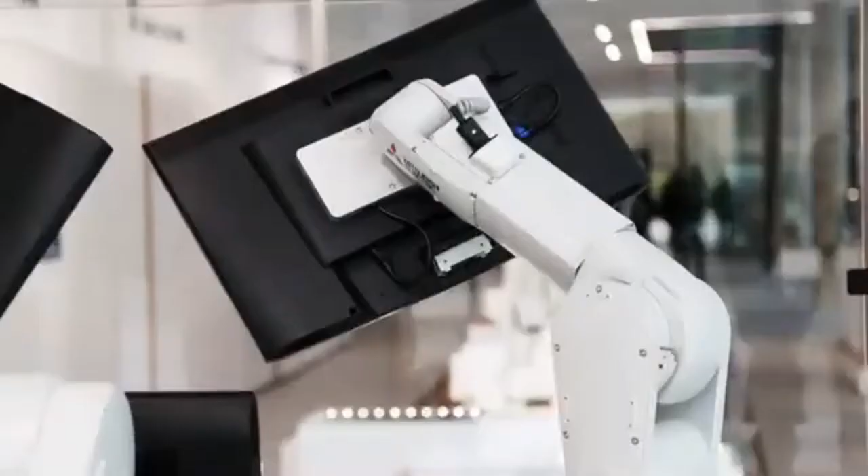To give a little bit of history on Mitsubishi itself, the Mitsubishi name and parent company has been around since 1870 and grown over 40 different entities and businesses it's dived into. You might know us from TVs, cars, VFDs, forklifts, all kinds of products, including CNC, of course.

But the CNC business didn't actually develop until 1956 in Nagoya. First office in the U.S. opened in 1974, and since then has expanded over 50 remote and satellite locations throughout North America and Brazil. Globally, we're actually in over 65 countries, there to support dealers and builders like yourself in Maxmill.

So with that being said, the product has also grown and had a lot of firsts in the market, such as the 32-bit CNC in 1986. In 1996, the world's first 64-bit PC-based controller. Now in 2015, we've got what we have now, the world's fastest dedicated processor, developed in partnership with another division.

So there's a lot of changes that have gone on and improvements. I've even spoken to people who've had a Mitsubishi controller in the past who have reacquainted themselves with some of the newer technology, and they're just blown away by how much Mitsubishi has progressed on the feature side of it and also on the service side of it.

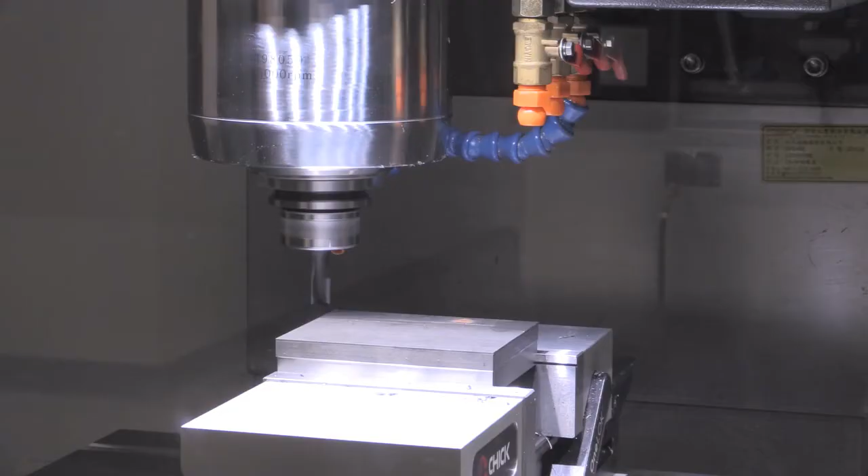Right, yes, of course. The dedicated processor is just one of the key elements making the Mitsubishi CNC what it is today, as powerful as it is. It's a dedicated processor meant to handle all the processes a CNC machine does without being bogged down by some of the other tasks a normal PC processor would do. You don't have to get bogged down by graphics or other calculations. It's solely focusing on the inputs and outputs, the G code processing, and the ladder processing, along with the servo communication.

Along with that, you get a little bit more productivity. Having that processor is going to allow you to have fine segment processing completed in a much shorter time while also improving the quality of your parts.

To put it into a different perspective, let's talk about the difference between our previous generation and the M80. The M70 series had a processing power of about 33,700 blocks per minute. Now, with the M80 equipped on all your Max mills, we're talking about 135,000 blocks per minute. So yeah, that's a big change, a big difference.

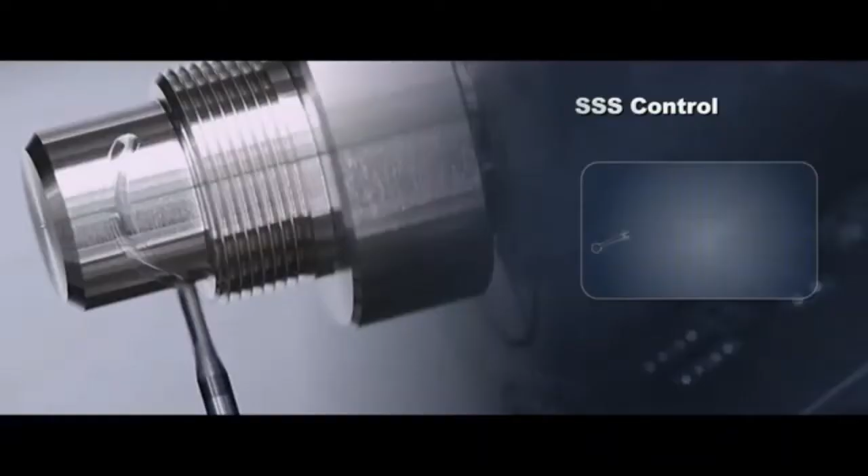Okay, so to clarify and further explain the quality improvement you'll get with this processor, we can discuss the super smooth surface element. It's just one of the features that's going to help you improve on the quality. It's on its fourth generation now with the M80, and you can tell it's definitely been refined along with other features such as corner control, our second generation spline interpolation, and tolerance control that will reduce the time to get from point A to point B on small segment machining.

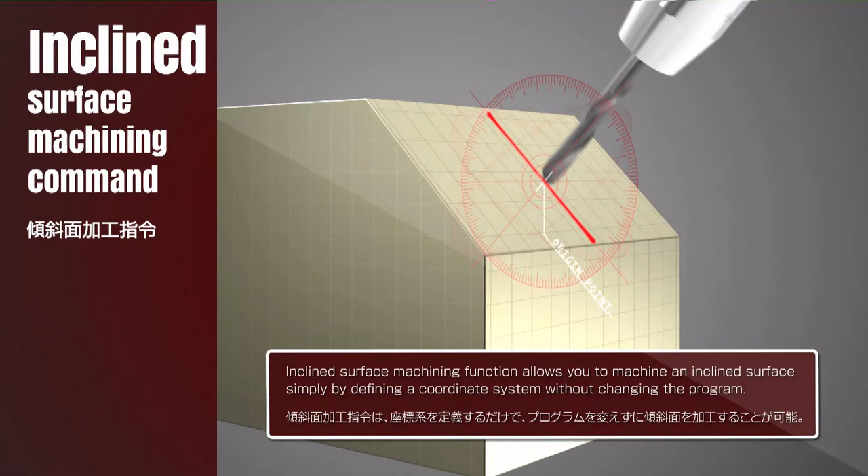So what that means in a nutshell is for anyone who's doing any high-speed machining, 3D surfacing, or mold work, what improvements are they going to see overall with their finished part quality?

A much smoother finish. Because of the look ahead, 1,356 blocks of look ahead, that's one of the highest in the market. Having that far of a look ahead, it knows to go in a smoother direction as it goes from point A to point B, instead of maybe small errors in the G code made by the CAM software where it has little spots here and there, not a smooth finish, sharp edges. All of that gets smoothed out with some of these features.

So that process can actually smooth out the code that's already in the machine to make it a better part than you would have gotten with a machine with a lot less look ahead. Correct, correct.

All right, well that's a really good feature for anyone doing fine close tolerance work or any surfacing. What about market share with Mitsubishi? I know there's a lot of big names in machining, a lot of builders who make their own controller or their own proprietary components. But Mitsubishi is a little bit of an underdog, kind of silently in the market that a lot of people don't really know is there. Can you talk a little bit about how some people might have used a Mitsubishi controller and not even known it?

You just get a lot more on your Maxmill machines. Some people might not know that we're actually behind bigger names such as Mazak, DMG Mori, Marubeni Citizen, and even Kitamura. They've kind of taken advantage of our ease of use to create their own front end, and that's one of the key things you'll learn while working with a Mitsubishi: we tend to be very user friendly and easy to learn.

They made their own custom screens, and operators don't have to go that far, but they can get very close to getting the feel and look of their current machine to that of another machine they're more comfortable with. If they have certain soft keys arranged in certain ways, they can also do that with the Mitsubishi control.

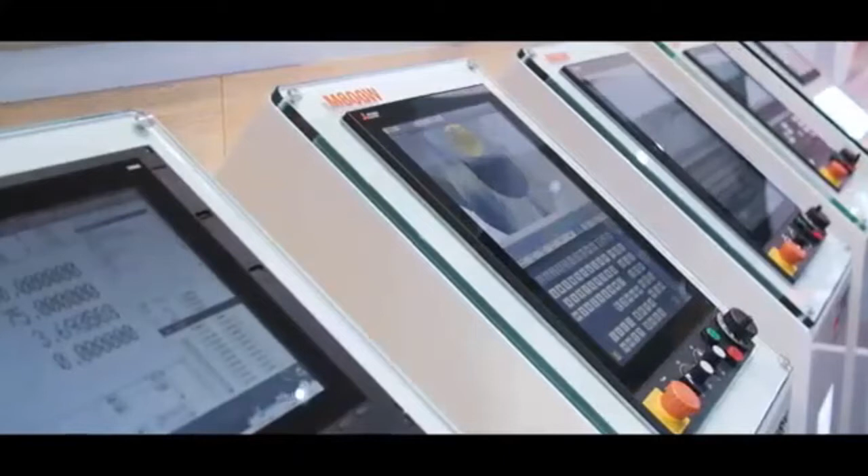Yeah, that's a really good point, especially since there seems to be a lot of hesitation in people I've spoken to. There's people who really like a Fanuc controller or really like a Mazak controller. Everyone has their preference, right?

Right. But I can speak from my experience working with CNCs for well over a decade. I've pretty much touched and worked with and programmed on most of the brands that are out there. And this Mitsubishi controller, from personal experience, I can tell you, was one of the easiest controllers that I've ever had to learn.

All of our Maxmill machines are equipped with a 15-inch touchscreen controller, and just as intuitive as it is to use an iPhone or another touchscreen device, you get that same intuitiveness with the Mitsubishi controller. Everything you need, your programming, editing, tool setting, all of that information is right at your fingertips. It took maybe about an hour or two to become comfortable with the control. Once you learn where everything is, you could just pick it up and go.

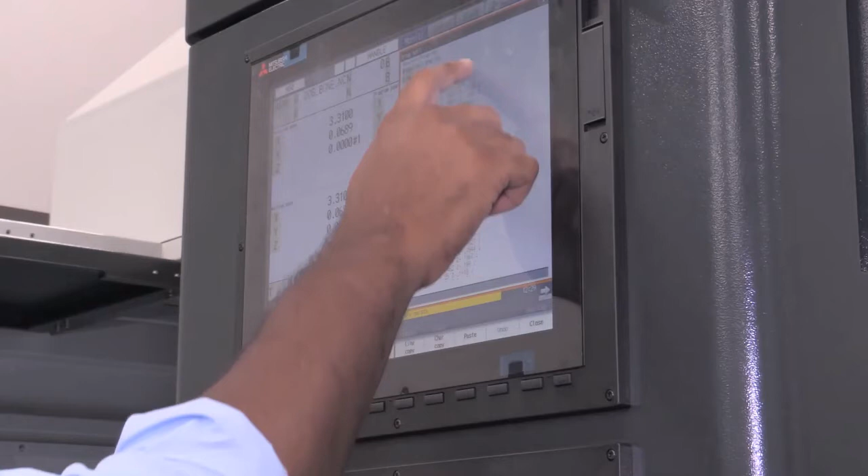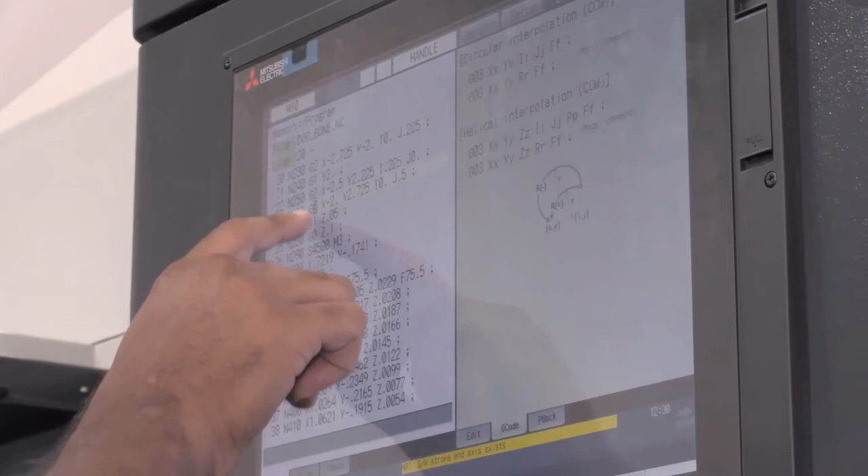And I was setting up a job on this machine within a couple hours of using this controller. So it is very user friendly, very easy to use, and now I can say it's one of my favorite controllers on the market without any kind of bias.

Yeah, glad to hear. Yes, of course. All 15-inch screens equipped on your Maxmill machines come with that intuitive smartphone-like touchscreen. Let's say you're not used to it and you keep touching at it, and it's taking you places or entering sections you don't want to be touching.

You can actually disable that. There's also a parameter that'll let you adjust the sensitivity if you need to wear gloves or anything that'll make it a different pressure point, or a little bit more pressure on it. All that can be adjusted or just disabled.

Some of the other things it lets you do as well, it lets you drag, zoom, pinch, double tap, and scroll through your program just like a smartphone.

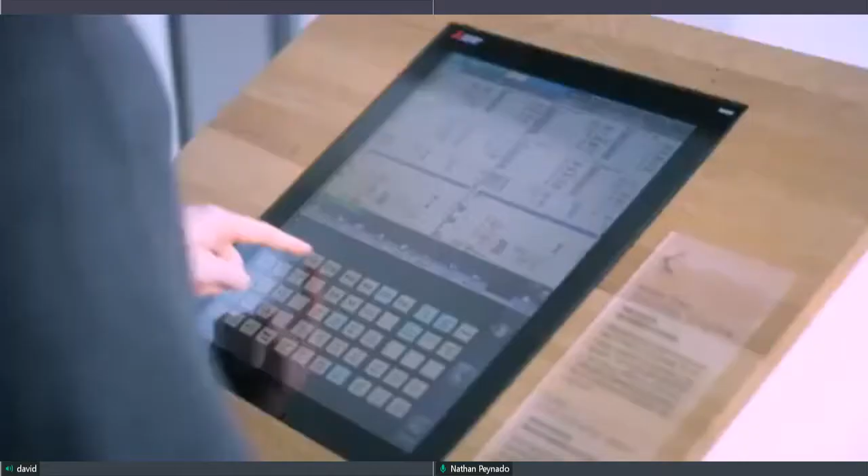Yeah, it really is like using a touchscreen PC or touchscreen device. I think it's an award-winning control, right? Didn't you guys win an award for ease of use?

Yes, the award in 2015 was a Good Design Award in Japan, because of its design and layout of the screens, its ability to customize and rearrange your settings. That's another credit to how easy these machines are to use.

Now let's talk about features for a little bit, David. You know, if you've ever gotten a quote for a CNC machine or looked at pricing, there is always the base price for a machine, and then a lot of control options - do you want high look ahead, a data server, expandable memory? All of these things add up to the point where the base machine's price and the price you end up with are two totally different prices once you add all these options to the control.

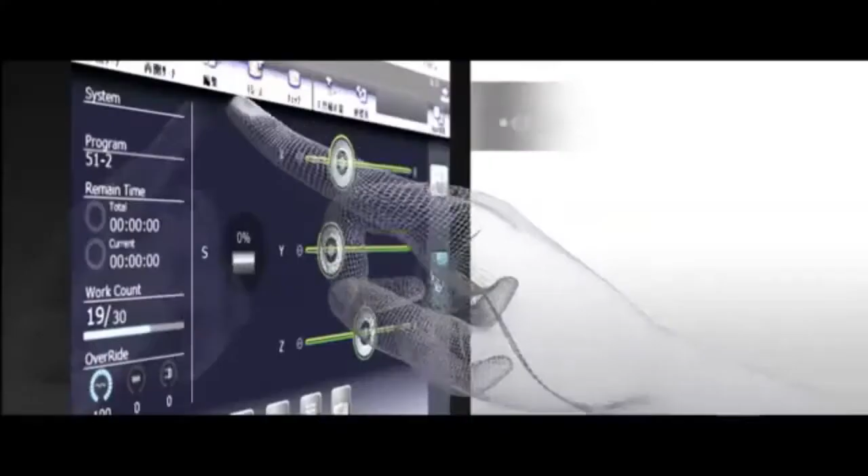Right now, what has Mitsubishi done, especially for imported machines like our Maxmill, to make that process pretty much eliminated? Very good point. As you said, the M80 is definitely feature packed. We talked about the touchscreen, and the unmatched processing speed of our dedicated processor. Along with that, all standard is the 1356 look ahead, also mentioned before.

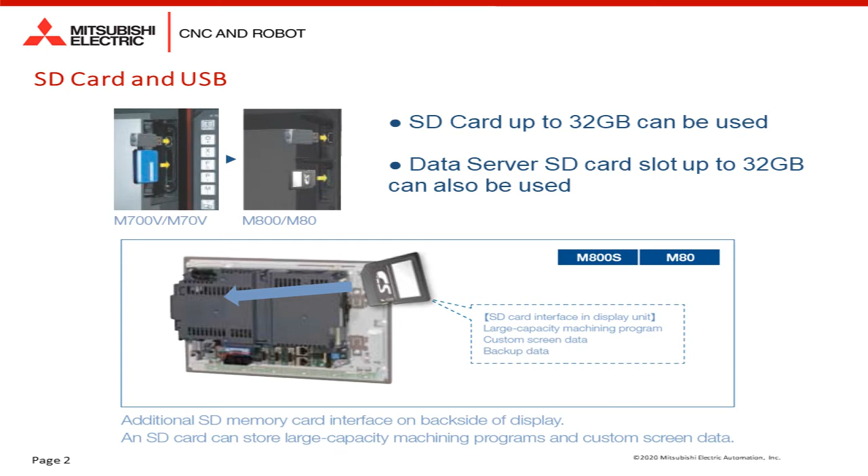One of the things you mentioned is memory. The control has two slots available, one internal and one kind of hidden, where you can put in two different 32 gig SD cards, which I like to think is almost considered internal memory just because of the speed it takes communicating and reading from that card. There is no lag when reading from it. 32 gig times two is 64 gigs, almost standard right out of the box that you don't have to pay for to make it work. Any off-the-shelf SD cards work, so there's a lot of memory right there.

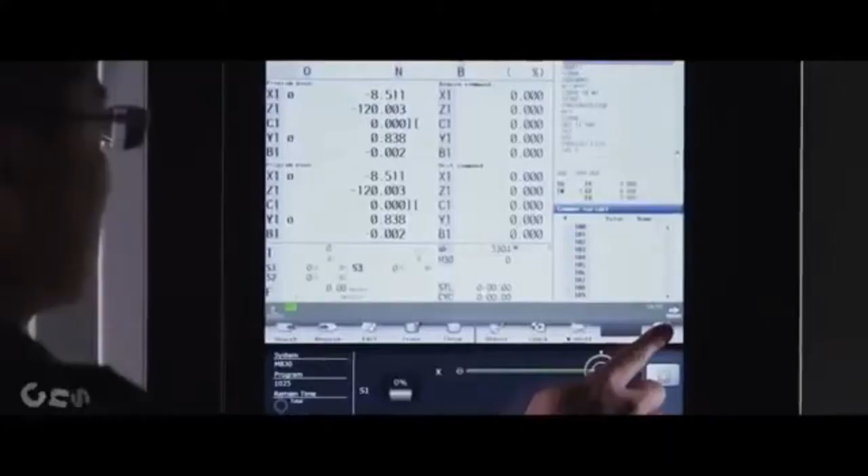Other key features include tool center point control, inclined surface machining, workpiece position offset for rotary axis, data server. There's so many. Along with that, we also like to provide a copy license for our NC Explorer software.

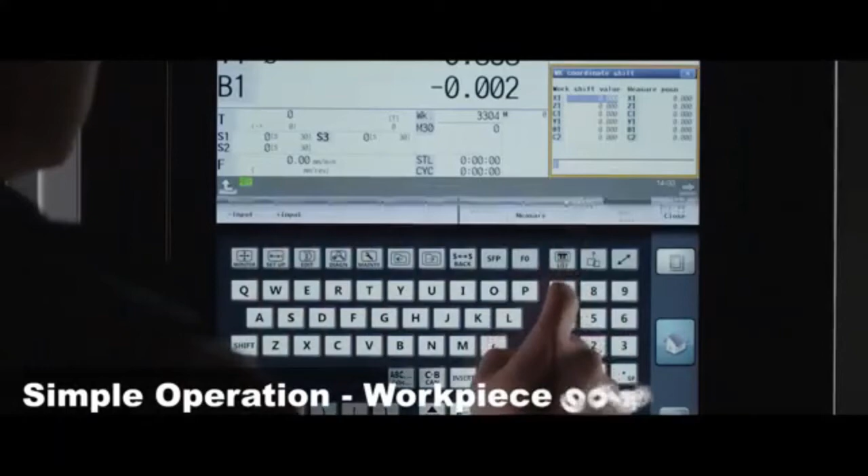Our NC Monitor 2 software allows you to transfer programs through an Ethernet line and also mirror your screens. What your operator is seeing on the shop floor, you can also see in a different place, away from the shop floor, from the machining area.

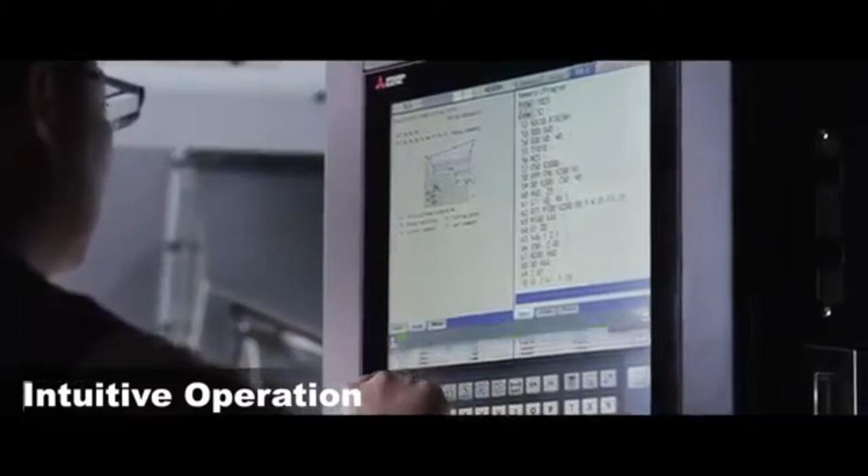Where your programmers are. That's a really good feature, David, because a lot of factory automation is going towards offsite monitoring, where you have your machines running in the shop, but then a supervisor or manager in another room - could even be at home or on vacation - can monitor the productivity of their shop and see what jobs are running, how many parts were made, what the cycle time is. All that can be monitored remotely nowadays, and it really does help with job planning and budgeting or quoting, because you can see exactly what your job is doing in real time.

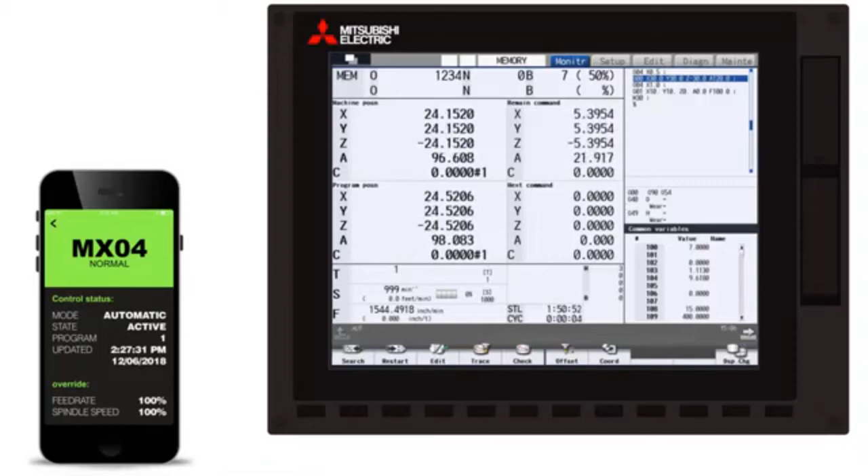Correct. Now, along with that, speaking of remote monitoring, you also have what we call the IMA Mobile. That, of course, is an option to enroll this controller, any control, and it's MT Connect compliant. So not only can you monitor your Mitsubishi machines, but you're also able to monitor any other MT Connect compliant machine. It's just another way where you can actually get notification text messages or pop-ups on your smartphone to know if there's a change.

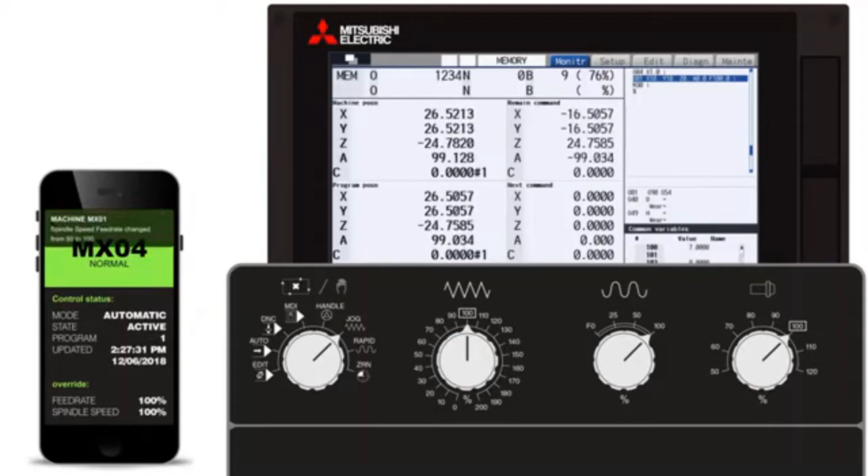You left the machine running, but now there's a warning or a stop. Well, now you'll get that directly on your phone or on your desktop to know to go take a look at that machine. It's something anyone can reach out to me for more information about.

Yeah, it's a really cool feature. We actually had that demoed at Southtec 2019, and it was really neat to be able to monitor exactly what the machine was doing from a cell phone, right there on the floor of the show. I can actually show you a little quick demonstration.

This is kind of a demo account where we have a few simulators showing their status. I don't know if you can make it out, but if we take a closer look, this machine seems to be in operating order, nothing wrong here. Now we look at another machine - uh-oh, we got a yellow warning sign here, so got to take a look and maybe see what's giving that warning, while this other one's in an actual alarm state. Now that one's going to need a little bit more direct attention.

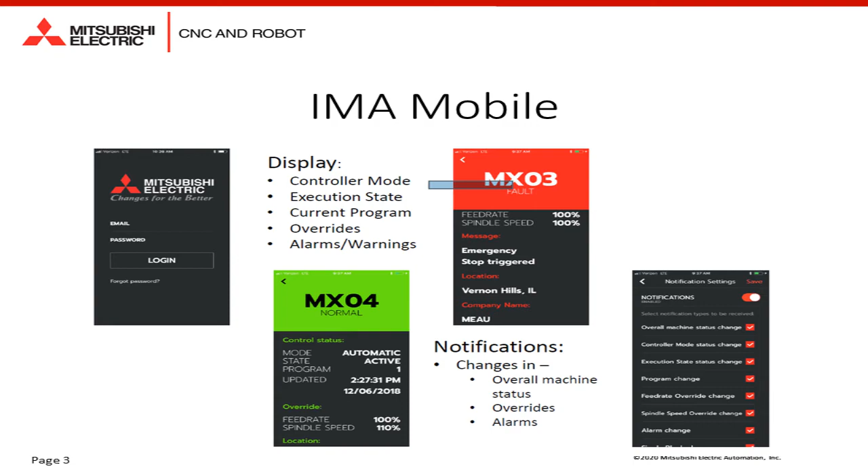So at a glance there, you had about 6 machines up on your mobile app that you're able to monitor the status of in real time? Correct. It lets you see what program, the feed rate, the spindle speed, the overrides, and there's a couple different packages in case there are certain features someone might want to look at all times. They can reach out to me for the right package.

All right, yeah, well I'm sure we'll have a few people doing that. One of the things I want to talk about also is your warranty that comes with the Mitsubishi machine CNCs, because I think it's a feature that's often overlooked that a lot of people may not know about, but it's a really important feature, especially when you're getting into maybe a change in direction with the machines you have, jumping in with a Mitsubishi controller, seeing what it's all about.

Normally when you buy a brand new machine, you get a year or 2 years warranty, or maybe you have to purchase an additional extended warranty for your machine. But every Mitsubishi component is backed by a 3-year warranty from the date that the machine is installed till 3 years later. Correct. What exactly does that cover, David?

Yeah, like you said, I don't know if it was pointed out or noted, but yes, that's one of the key differences is that our warranty is first of all 3 years, which is not something that other providers are coming with as standard. But Texmac customers are also getting a full bumper to bumper protection.

The warranty is starting day of install, not when the manufacturer made the machine. That's one of the key differences as well, from the date of install. And that covers everything from motors, the control, the screen, drive, encoders. If it's made by Mitsubishi, it's covered by Mitsubishi, along with the travel and labor included to troubleshoot and repair those potential issues.

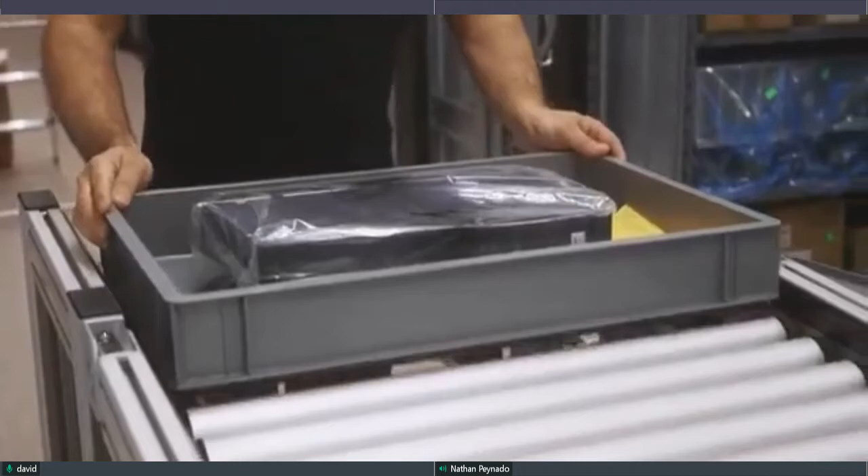Yeah, that's one of those good things that kind of pays for itself down the road, because if something goes bad years from now, you know that you're covered by Mitsubishi, not only for the replacement part, but also for the labor for the guy to come out and do the replacement. So that makes a lot of people feel comfortable investing in one of our CNCs, because they'll have the support for years to come.

And that only adds to it with that expansive service network that you guys have. It'll give them the opportunity to take full advantage of that. Right, the product, as you know already, is rock solid. But regardless, we offer this 3-year warranty for pretty much assurance to know that Mitsubishi support is there to get you back into production.

Yeah, that really says a lot about the dedication and attention to detail that you guys put into your products, for sure, because you stand behind it better than any other control builder really does stand behind their products.

Thank you. So as the industry right now, if you look at the way it's advancing, there's a lot that's moving towards automation nowadays, right? You're starting to see as some of the more skilled workers in machining particularly start to age out of the industry, there's a shortage of skilled people to replace them. There's a lot of shops with old guys with all the skills and knowledge, and they're headed out the door to retirement when there's not a lot of training going on to help replace some of those older guys with that knowledge.

But what the industry is starting to move quickly towards is automation. You're starting to see a lot of cobots, a lot of robot cells in factories now that would do things like part loading, machine tending, and inspection. How has Mitsubishi simplified that process and made it easy for, let's say, a small job shop to jump in with getting robots programmed with the machine?

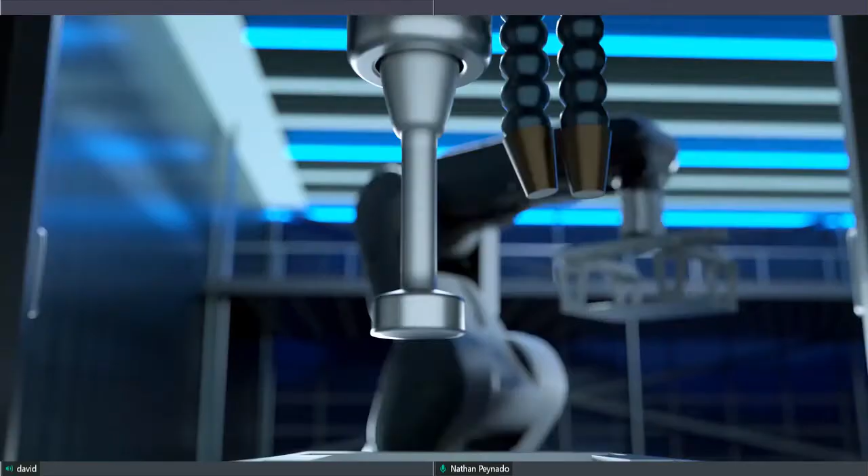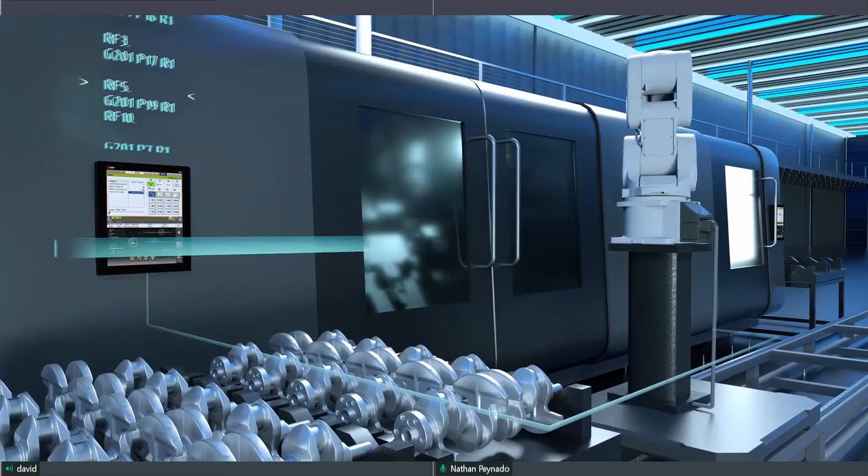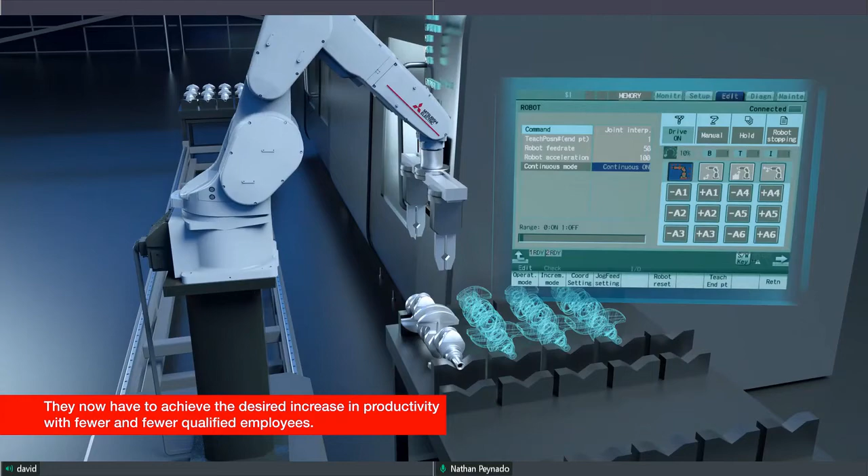Well, actually, we just came out with a new feature called Direct Robot Control. Our DRC feature, Mitsubishi is able to use the same CNC screen to control, program, and set up, communicate back and forth with your industrial robot for machine tending. It's very interesting, I tried it out a few times, and you can pretty much have a complete robot system without the added control that you normally would have.

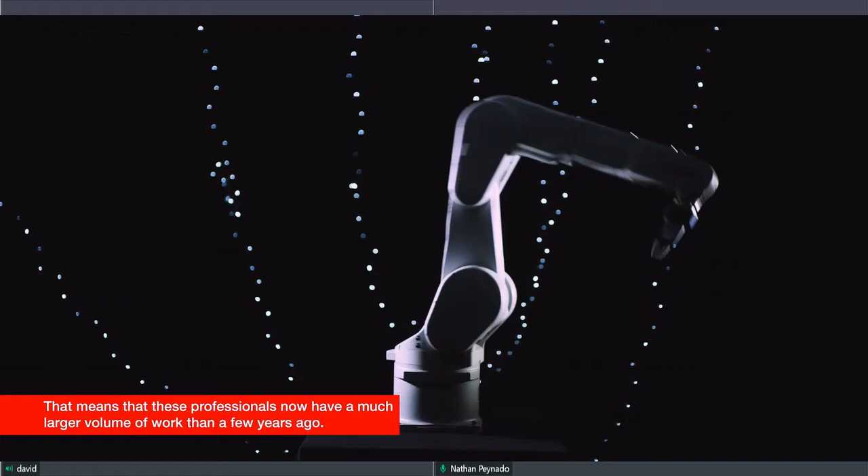You also mentioned a cobot. I'm actually excited to mention that we just came out with our cobot into the market, and its distinguishing feature...

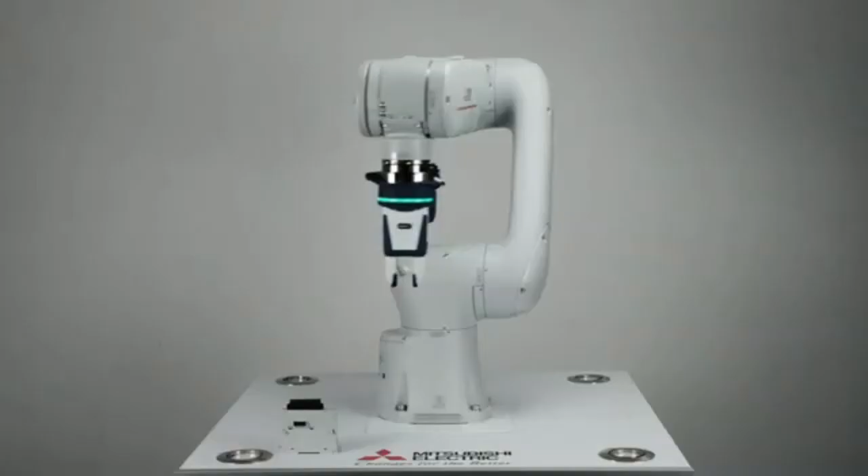is that you can actually set up this cobot to be in cobot mode, where it basically operates at a safe speed and feed rate, and change to a high speed or industrial mode, where it's operating more like an actual industrial robot at a much faster speed. Of course, you always want to have safety measures such as a light barrier when in the high speed mode.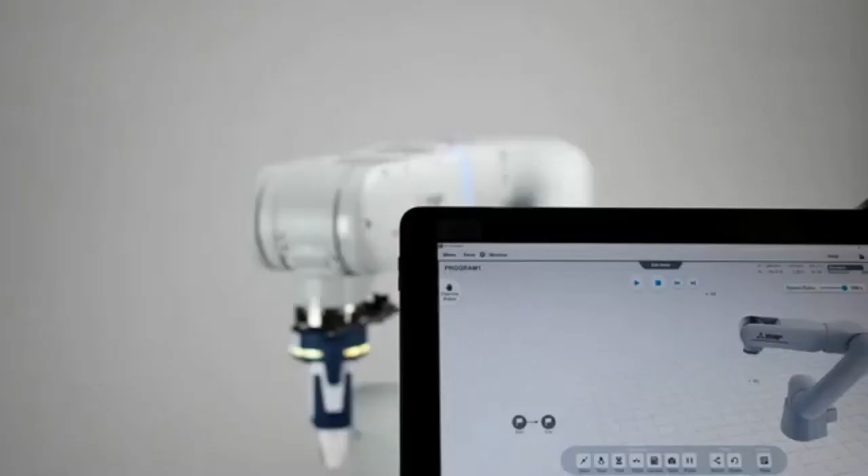The cobot, just like any other cobot out there, is very safety focused, and allows you to teach it easily with conversational icon-based programming. Like I said, you're also able to control and program it using the DRC screens in a G code format. Instead of learning a whole new language for robots, you can use the same programming code you're already familiar with: G00, G01 commands, rapid movements, and feed movements to go from one point to another.

Yeah, that's really helpful David, especially for someone who's nervous about adding robot automation to their CNC. It seemed like the process would be a lot simpler with the Mitsubishi Controller and the Mitsubishi Robot, because first of all, there's less hardware. The same controller for the robot is the same controller for the CNC, right?

Yes, for sure. Thanks for mentioning that. The interface is made that much simpler because it's only a simple Ethernet line to communicate between the CNC and the robot. So it's a lot more streamlined, and if you know how to program G code, you already know how to program this robot. You just got to set it up and program it to do part loading.

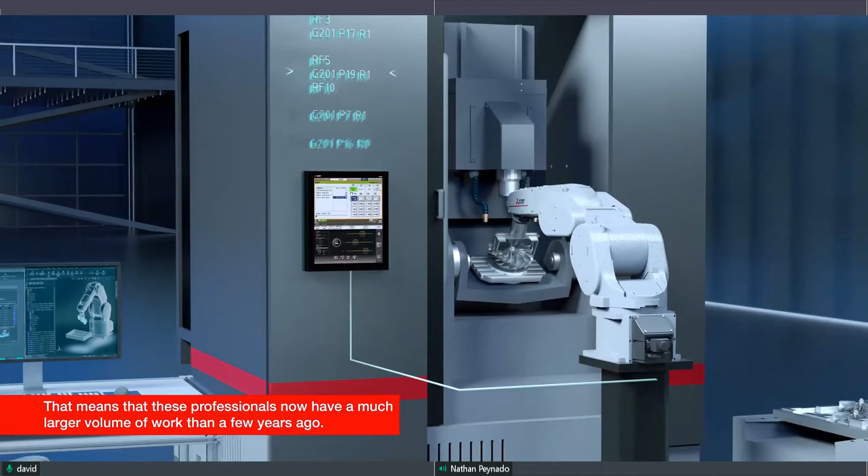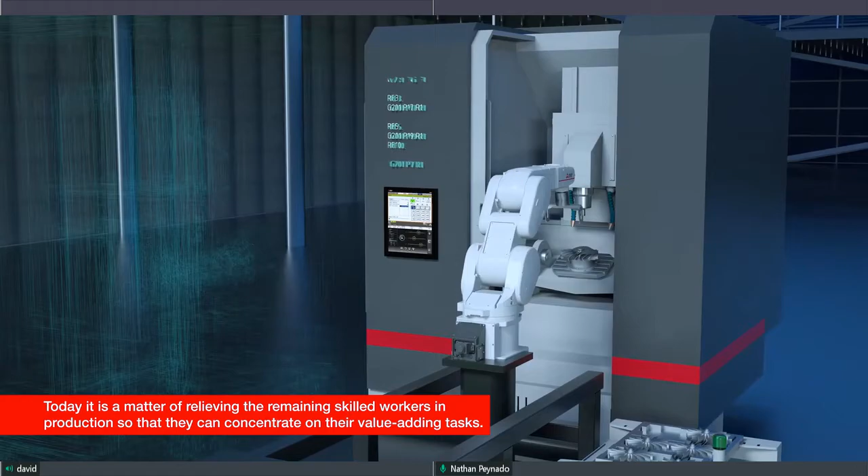Correct. Just a slight modification to the ladder, and you have a working system. Awesome. All right David, I think that pretty much covers a lot of the points we wanted to talk about today. Did you have any final thoughts to wrap up this meeting?

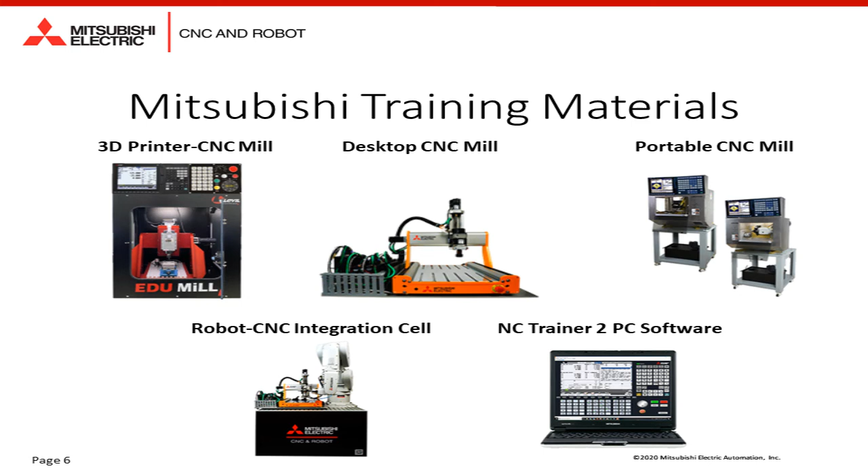Right, so you guys really do a lot to support people adopting Mitsubishi. Because I remember when we first reached out to you guys, Nick sent a sim right over to us so we could get a feel for what this controller was all about. And after using it, we were beyond impressed with the capabilities.

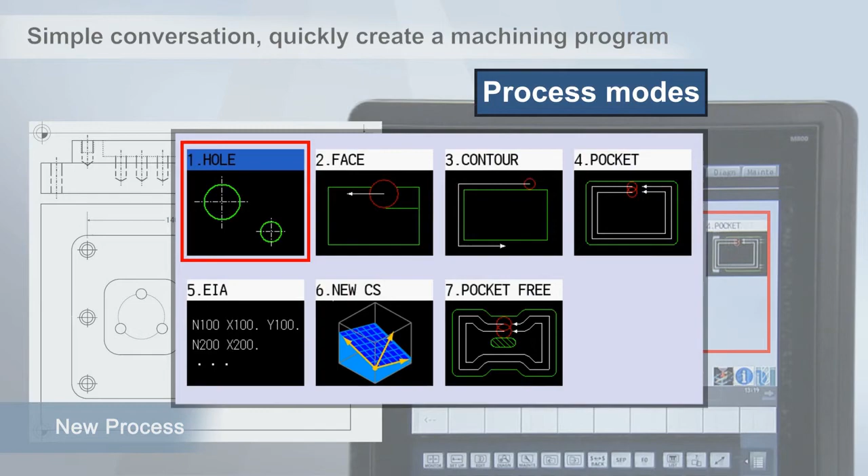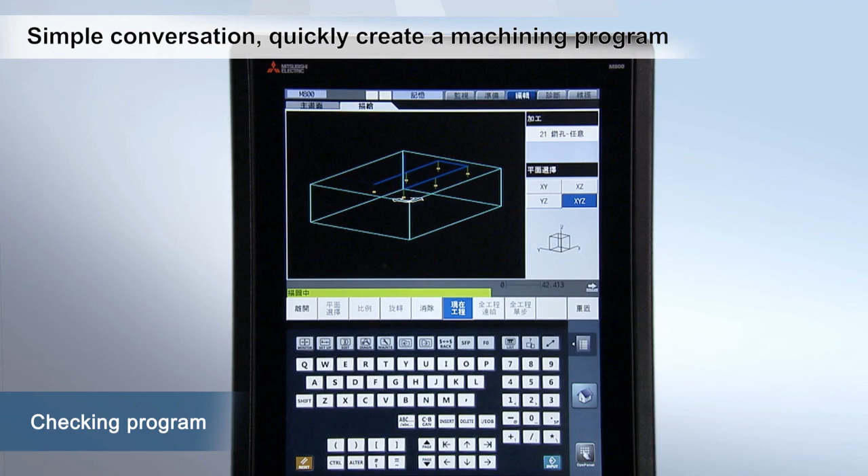Now you talked a little bit about NaviMill, the conversational programming as well. That's another one of the features that's included standard with this Mitsubishi controller, correct? Correct, yeah, everything we talked about today so far, except for the IMA mobile monitoring, is all standard with the Mitsubishi. The Mitsubishi control is MT Connect compliant, so if you already have a system, it's just getting an adapter from us and you're ready to go.

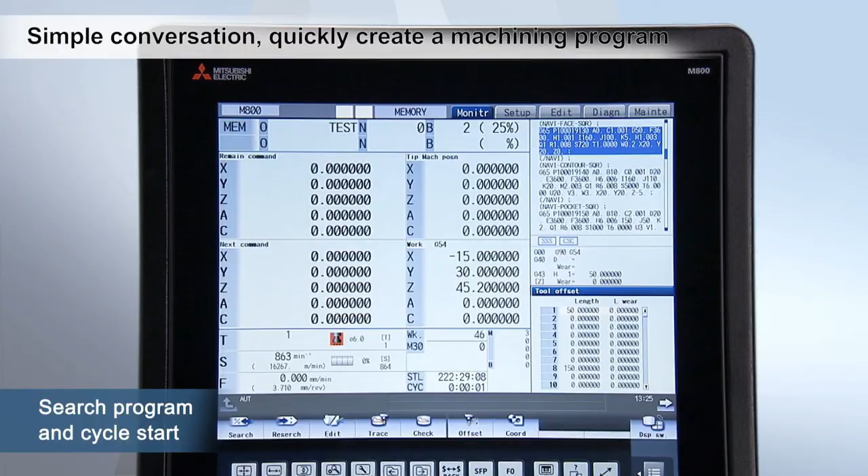All right, all right David. Any final words? Any last thoughts before we end this webinar?

Well, I guess thanks for allowing me to bring some awareness to your followers. Remember that Mitsubishi Control offers many benefits. Many options come standard right out of the box: the fastest processor in the market, 3-year warranty from the day of install, complimentary training, and free software licenses to communicate and monitor within the network.